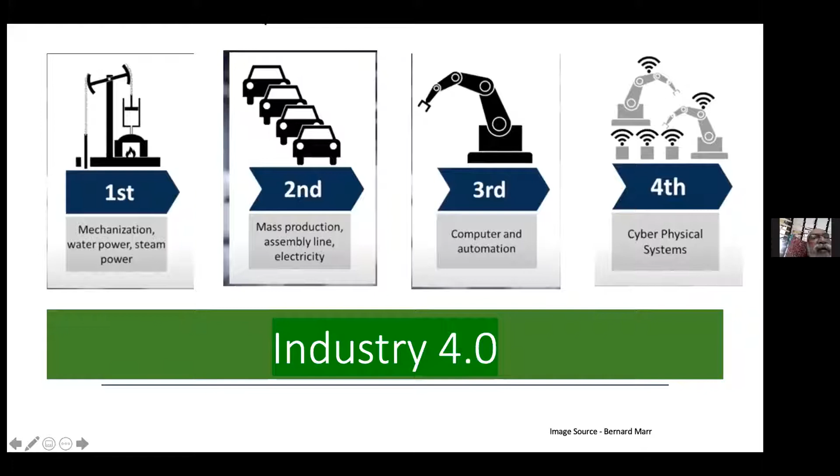I've taken this course from a talk by Bernard Marr, a thought leader in this technology space. So let's go through the 4 industrial revolutions. The first industrial revolution started around 1770, over 250 years back, when mechanization was done with the availability of things like steam power and water power - when mills and all were started, where water mills and steam power were empowering some kind of mechanization to be done.

The second industrial revolution was really when there was mass production with the advent of electricity, about 150 years back in the 1850s-1870s, when assembly lines and all started getting organized, partly because the main driver was that availability of electricity changed a lot of the things happening in the industry. The third was about 50 years back when the first computers came into the industry, and a lot of automation happened then, particularly in service sectors like banking, travel and all of that - there was a whole lot of automation driven because of the advent of computers.

The fourth is what is expected now in terms of Industry 4.0, defined as cyber physical systems. What is leading this is really the availability of two things: one, the internet, because it's connecting everything. So far the ubiquitous nature of the internet was lacking, it was not available as much. With the advent of newer technologies and speeds going up, with 5G coming in, this is only going to increase - we constantly see elements of this happening today.

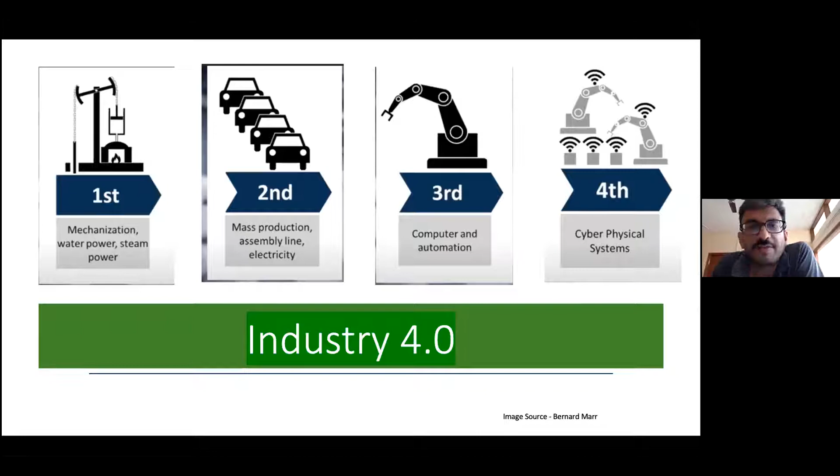Now, Industry 4.0 refers to the convergence of technologies: advanced robotics, manufacturing, augmented reality, simulations, cloud, internet, cybersecurity, and big data.

One of the things that happens when so many devices, billions and billions, are connected is that it gives so much data that has to be handled, residing with the connected systems on the cloud, where analytics could be run to find patterns and predict a lot of things.

It is expected—I was seeing a talk by futurist Tony Seba, which says industrialization and automation levels are going to reach such a high degree in coming years in terms of autonomous cars, as well as the ability to sense how much parking is available, that people will stop owning cars. One fallout is expected to be that real estate prices in America will fall big time because the number of parking spaces will come down. So that's the kind of impact that's going to come with technology becoming popular in the coming days.

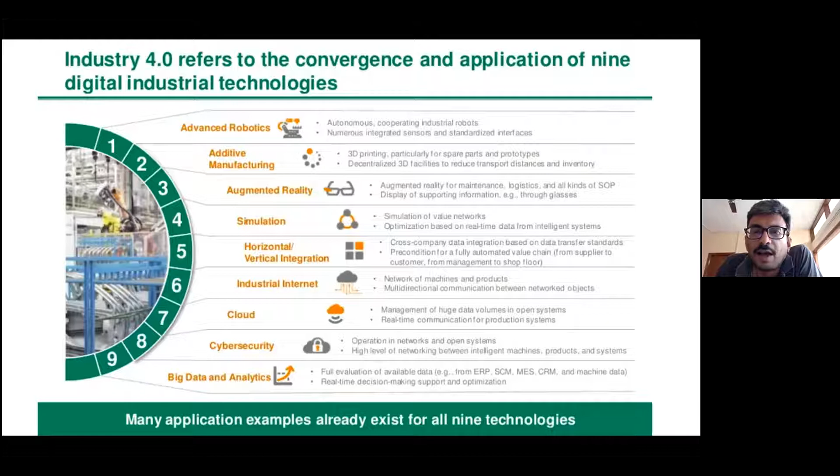My particular involvement—I wanted to talk to you briefly about this—is that when we were all in school, I'd assume we had not much exposure to this. Today there is a lot of emphasis in our academic career space towards this, and I have been involved with bringing up a lab in my own school.

This is actually sponsored given the importance of Industry 4.0, which is so significant that today the government has recognized it and is funding labs called Atal Tinkering Labs in schools, both private and government, where these kinds of technologies are coming in. So no longer do children have to wait until engineering to get exposed to this kind of technology.

Fully sensing the importance of this, the Atal Tinkering Lab is something I've been involved in setting up in my school, where children in class 9 and 10 are exposed to things like 3D printing, sensors, controllers, drones, design thinking, computational thinking, ideation, and so forth.

That is the kind of impact technology is having, that even in the school curriculum today we are going to see so much of it being brought in. So that's briefly from me. I'll stop here and let my co-host Ravi Huddar talk about his own experience closer to the industry itself. Thank you.

Good morning. Ravi Huddar, '88 batch, electrical. Good morning, Ravi.

Sanjit has given a brief introduction about what 4.0 is, starting from the first revolution. I've been in this business, industrial automation, for the last 25 years. What he described is revolutions 1 and 2. The third revolution started in the 1970s, where we were more into controls, PLCs mainly, and now 4.0 starts.

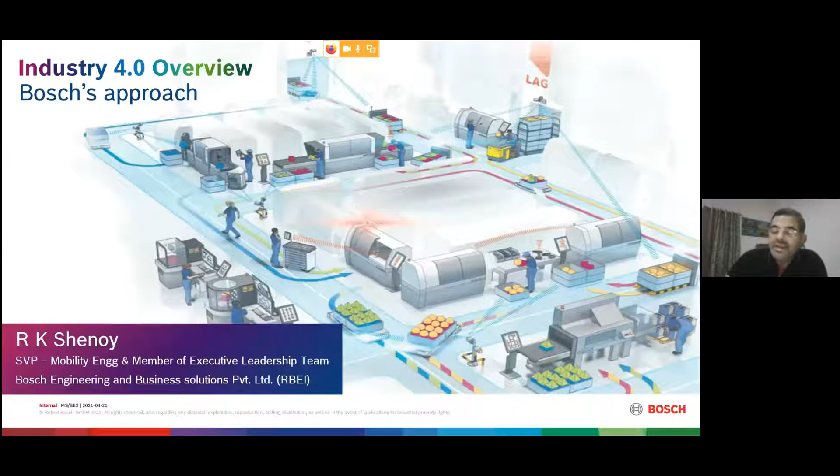Okay, thanks everyone, nice to be on this platform. I'm glad to talk on Industry 4.0, a topic where a lot of work is happening. I'd like to give a short intro on how I see Industry 4.0, and then go on to what we're doing at Bosch with some examples so we can connect with this topic well. I'll skip most of the intro, except to say that since 1986 I passed out in electronics communication, and I enjoyed staying in engineering, which is why I've been with Bosch all these years, working across various domains. I started with industrial automation for the first 4 years, then moved into mobility. Now I'm connected with Industry 4.0 more from the perspective of offering solutions and products that go into it.

Before I get into Industry 4.0, I'll start with how we see the mega trends happening, which directly connects with this topic. It's clear that most of the population has started living in urban spaces, almost 70% by 2050, which is why cities are becoming more crowded. The alarming part is energy consumption worldwide, we need 30% more by 2035. This means whatever energy we generate today, from fossil fuel and renewables, if we want to improve our living environment, air quality and other aspects, the challenge will be how to generate more energy while reducing dependency on fossil fuel and improving energy efficiency in buildings, industry, and so on.

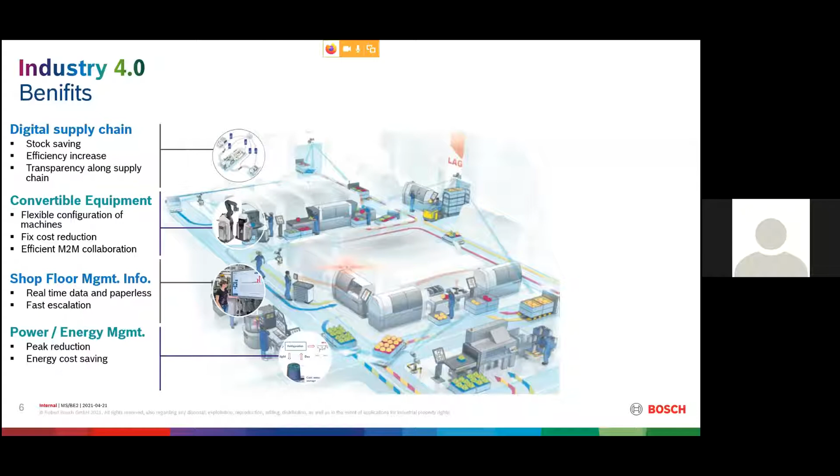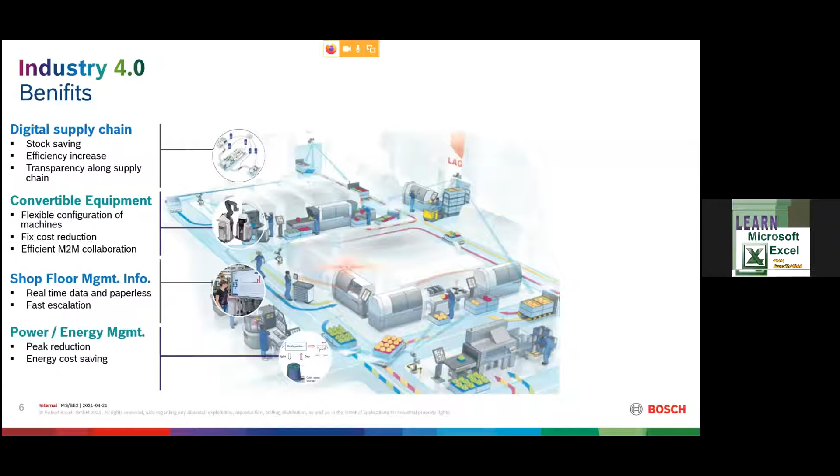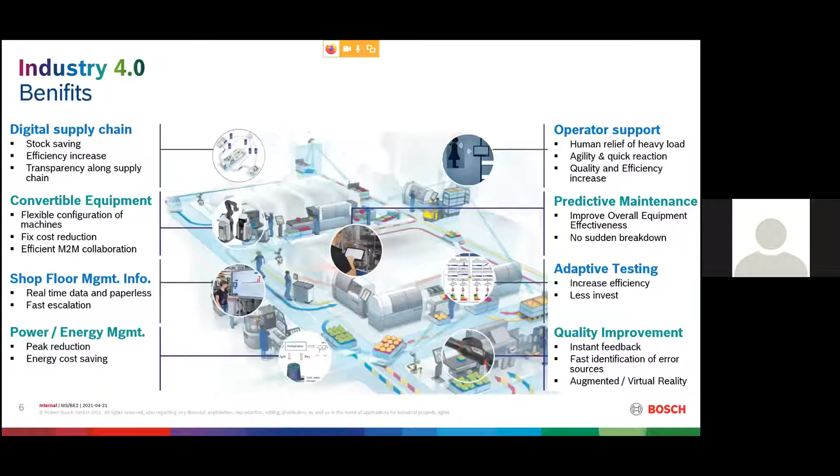Hello, RK. Hola, are you trying to? Hello? Sanjit, are you trying to reach out to RK? Hello, RK, we can't hear you. I'm just calling him, just a minute. Yeah, that is better. Hello. On his other line, you can call him. Yeah, he's unable to hear him, right? Yeah. Try stopping to share and just raise it once. Yeah, we can. He's on mute now. Now can you? You removed mute? Can't, just okay. I can't hear you.

What is the issue, Sanjit? I'm speaking to him, Udupa. Just a minute, please. RK Shenoy? Can you log out and log in? Maybe you just rejoin the conference. Yeah, please. Sorry everybody, he seems to have some problem. I just spoke to Mr. Shenoy, he will log out and log in again. His session is on, but for some reason the audio is not picking. Okay, just give us a minute. He's going to log off and log in again.

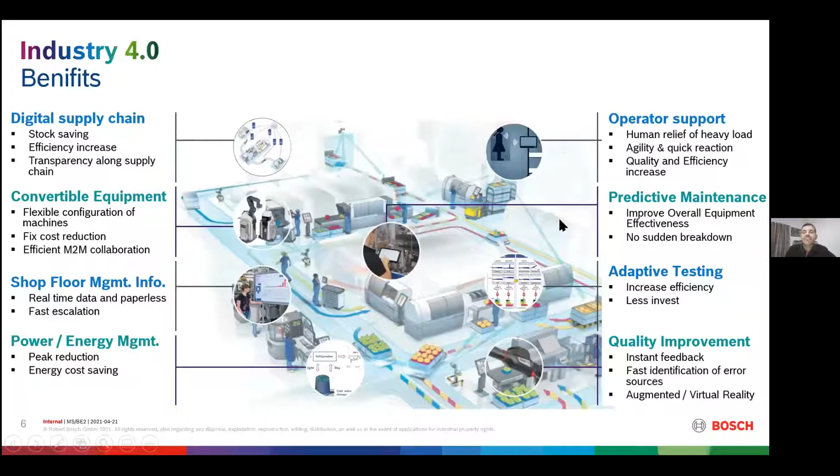Mr. Shenoy, are you back? Doesn't look like it. There's a handful of people joining back, you can hear the beeps. Yeah, he's joined back. Are you able to hear now? Yeah, we can hear you now, sir. Okay, I'm really wondering why. Share your screen and image. Yeah. Good, we can restart, no problem. Okay, I'll just share the screen. Good. Are you able to see now? Yeah, we can see your screen. Okay, great. Yeah, very sorry for that. I don't know what went wrong.

Can you go to the slide now? Yeah, now are you able to see slide 6? Yeah, we can see it. Please go ahead. Okay, yeah, I'll just go a little bit behind.

Basically, what I was trying to say was, I don't know where you could hear me last, but we are talking more from the benefits point of view, starting from the digital supply chain, which I already mentioned, and convertible machines. On power management, which is most important to reduce overall greenhouse gases and to save cost on power, we have various products that do this. For example, what I was mentioning was a product like Phantom, which is non-intrusive, on the power line. This product is able to look at the signature of the power line and understand whether the machine is behaving like it was when installed, based on the current being consumed by individual motors, drives, heating and similar components on a given machine. Based on this, we can tell whether there is opportunity to save, as well as find out faults coming up on individual motors and drives in machines. Predictive maintenance is one outcome of that, where if there's a misbehavior, you can know from such signals, as well as from vibration, for example.

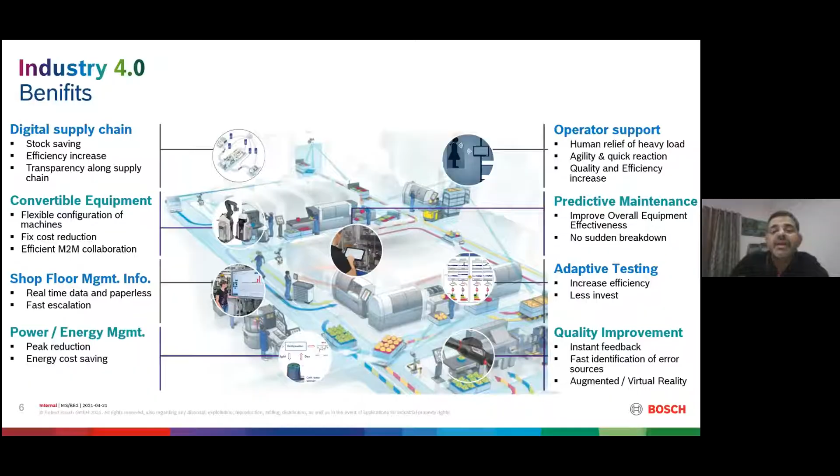To show an example, this is how we believe factories will look like, where as you see the machines here, many of them are independently configurable, and there are robots put in between. Basically, we are talking about having robots within the manufacturing line running maintenance on its own, for example, replenishing the products through supply chain and energy management, like I mentioned already.

And all this data then goes to the cloud. So across all the factories at Bosch, for example, we're able to tap the information from multiple locations. So I can do benchmarking between plants to see whether one particular plant is much better than the other, and then learn from them and implement.

Of course, the whole thing runs on the assumption that they're all connected, and with 5G coming up and the high amount of data that can be derived, Bosch went ahead and registered for a pilot implementation of 5G in industrial application. Unlike 4G, where communication is normally between a node and a central tower, and you have to connect back to the node to collect information, in 5G each node can communicate with multiple nodes directly. So it's more of a networked environment, with a high amount of data.

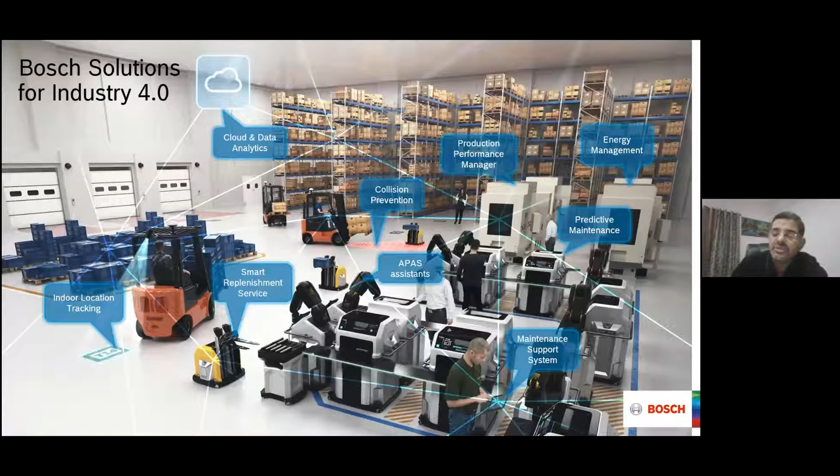So these are what are going to be used in the future. Now this, of course, goes beyond the factory for the whole supply chain, either towards the supplier or the customer, if we are able to track with RFID and many other methodologies of connectivity.

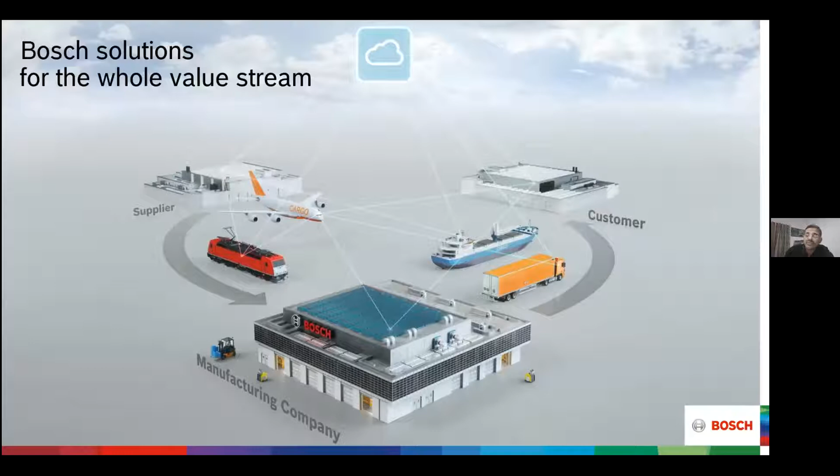And goods, for example, when taking medicines, you're supposed to organize and ensure that they are kept at a particular temperature. There are temperature sensors put on each of the containers to ensure that. And some of them, for example, we need to ensure whether there was a vibration or a fall. So these are also measured through RFID tags with sensors, meaning there are active nodes which can use this information when the item is actually received at the customer, to see that they were properly handled throughout the supply chain.

Now, when you talk about this value stream, what you typically see is the top of the iceberg, which is basically connecting, using the information and using the intelligence. But obviously, Industry 4.0 cannot be implemented unless we have the basic framework ready, and that is what we call below the iceberg — meaning you need to have expertise, a modular platform architecture, standardized IT infrastructure which can enable it, and standardized interfaces between machines through open architecture. Only then is it possible to take benefit.

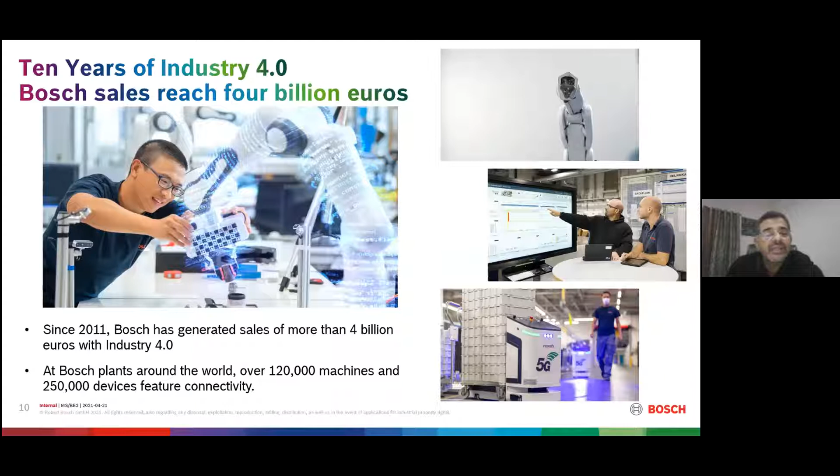So at Bosch, just to quote, we use Industry 4.0 both for our own plants, and this is also a business at Bosch. We actually help many other companies set up Industry 4.0 aspects. And that is where even in India, RBEI, that's Bosch Engineering which I come from, we have one activity where there is a team supporting many industries. I don't want to do a marketing talk here, but just to say it's part of the business as well — meanwhile, it's not just helping us, but we are actually using it as a business.

I'd like to run a short video. I hope it works on Zoom, just to show how the future of robots looks like. This is a robot which is called APAS.

Basically, as you know, it's not allowed for people and robots to work together in an environment, and robots are always put in a sort of cage, because there is a definite possibility of accidents between people and robots. Whereas this cute little robot, which is meanwhile used — I'll try to run the video, it's self-explanatory.

Looks like it's not working here. I think you need to come out of screen show mode to run a video. Now I came out, are you able to see the screen where the video is? Yes, but you're still on screen mode, right? We can see the screen, but the video is not running. The presentation is still on.

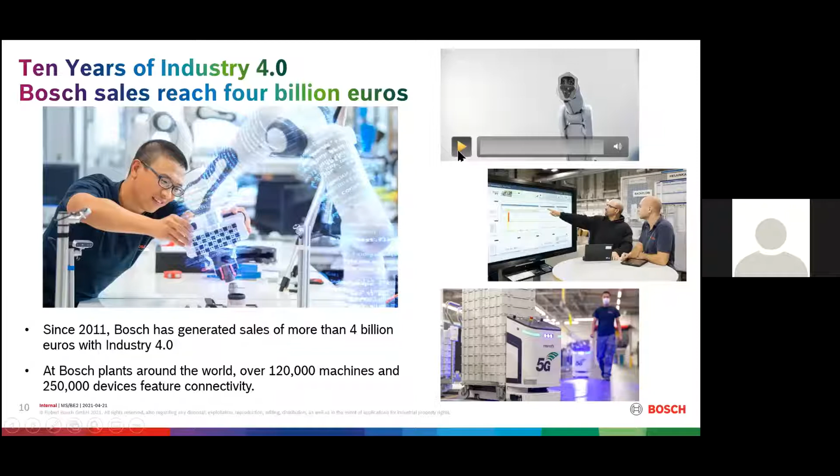Stop sharing the presentation and share again. Yeah, I'll do that, I'll stop share here. One option is to share the entire screen rather than just a specific application like PPT. No, my problem is that on Firefox somehow it's not allowing.

Okay, are you able to see now? Yeah, you can see it. Please go ahead. I'm very sorry, on this particular notebook I didn't have the Zoom app.

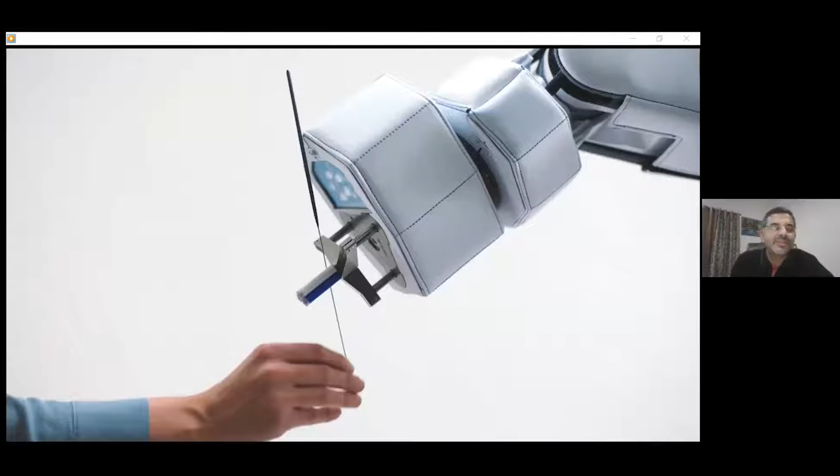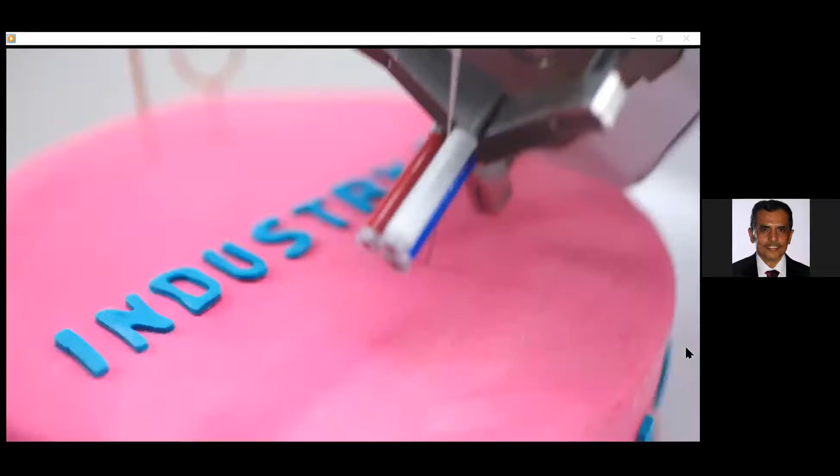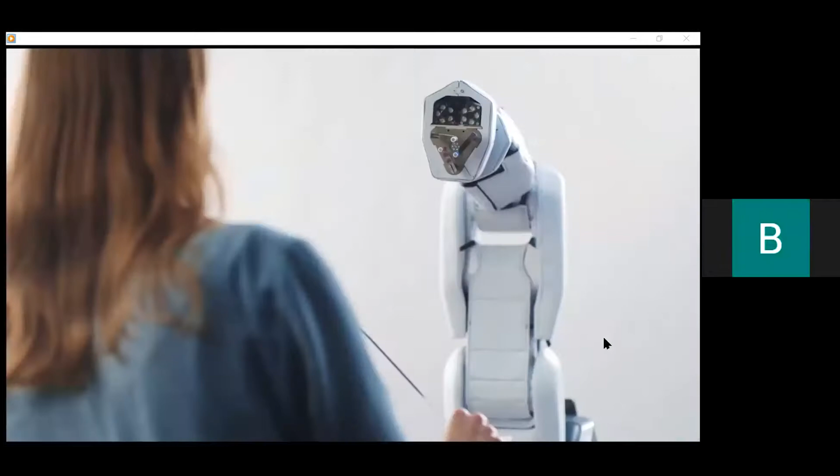Are you able to see now? Yes, we are seeing. Volume is there? No audio, I think before sharing he has to click audio share. Okay, one second, on the left bottom corner there will be an audio option. Share the audio. Okay, I'll do that. Oh yes. No microphone, not there.

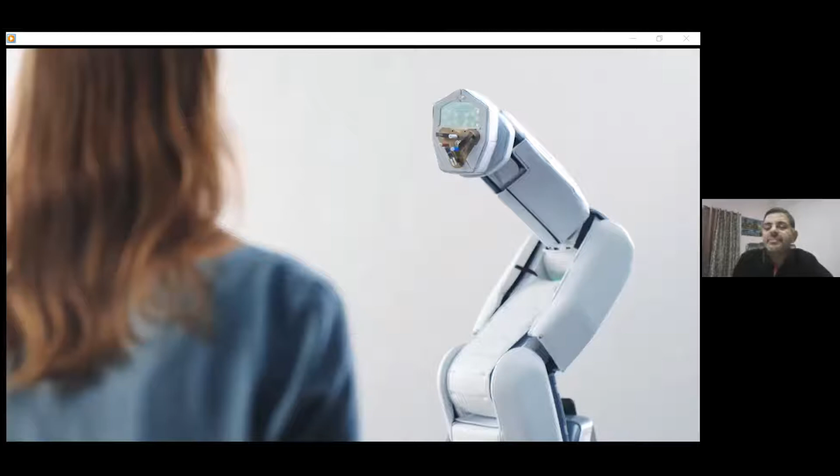Okay, I think it seems to have a problem, I will go ahead without the audio. That's fine, you can give an explanation, Shanai.

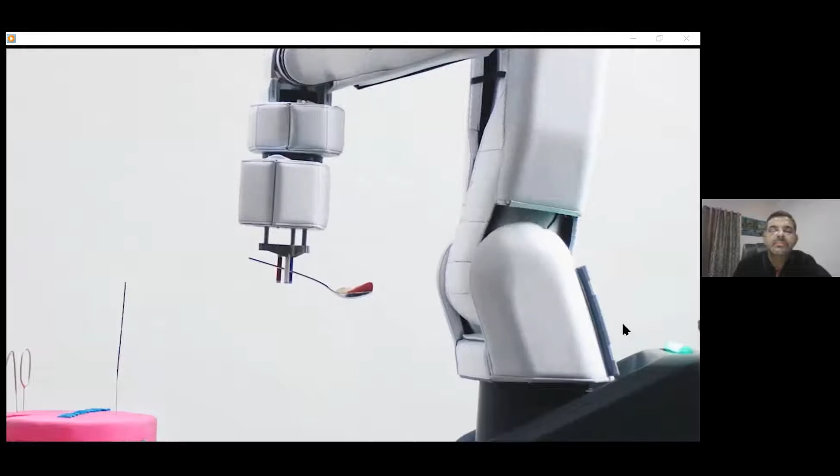Now I would stop here because it has taken quite some time. Sorry for the audio and video challenges we had. Now I think we can use the time for conversations.

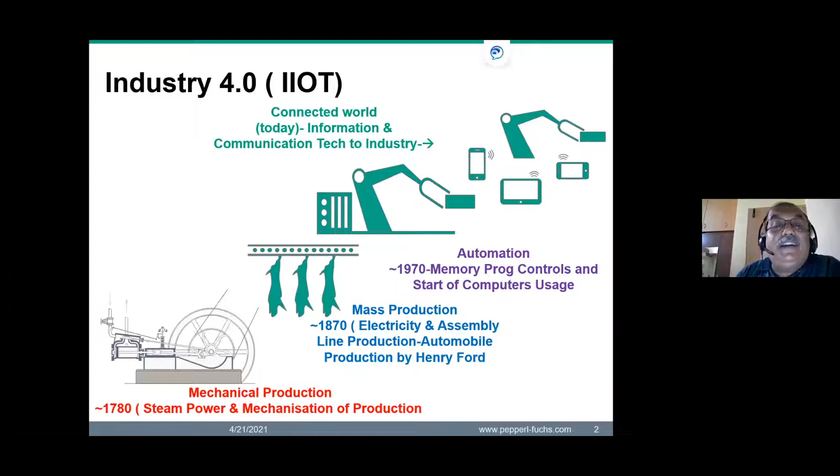What is Industry 4.0? It is nothing but Industry 3.0 plus internet with data crunching. That's all I can say.

For that, we need a smart sensor to give the data back, because earlier the sensor we used only gave the output. Later it was our duty to process it. It would not take the command back.

So now the smart sensor has intelligence, bidirectional communication. It will store the data, and it can do parameter setting, all those things. So it helps in troubleshooting and maintenance, all those things. It's manufacturing plus internet with the data, that is called Industry 4.0, meaning Industry 3.0 plus internet and data.

The smart sensor is a communication-ready sensor technology, which will allow the sensor data to be transferred effectively. The sensor is the same sensor we used in Industry 3.0, but the only thing is these sensors are communication-ready to make them smarter. So Industry 4.0 is only the nomenclature.

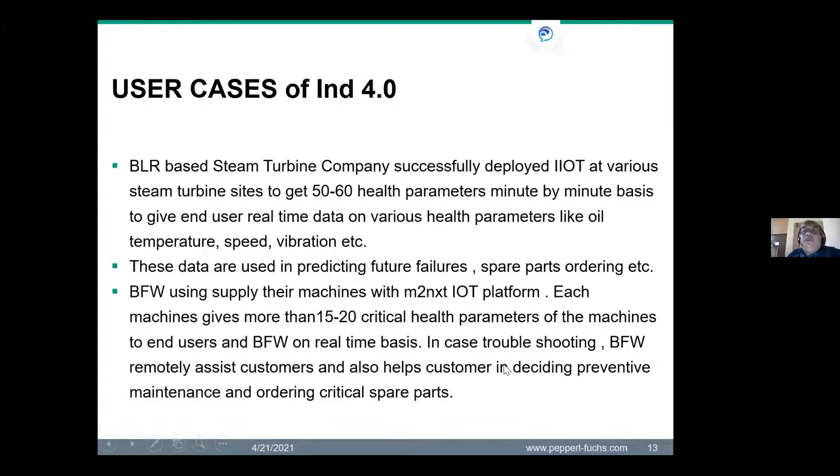And BFW, which is a very old machine tool company, has their own in-house m2nxt IoT platform. With that, they are remotely monitoring 15 to 20 critical health parameters of each machine they supply. Sitting in Bangalore, they can monitor the working of the machine and guide the customer on what they have to correct and what spare parts they can order in advance, so that there is no breakdown maintenance.

So thank you. Mr. Udupa, can you help me with this small video? Because hyperlink, will it work? Let me see, I don't know. Okay Ganesh, directly run the video from YouTube, it's easy. Don't embed it, go to YouTube, put this link and share the screen. Okay, one minute. Or if you can put the link in the chat. Okay, I'll do that, hold on.

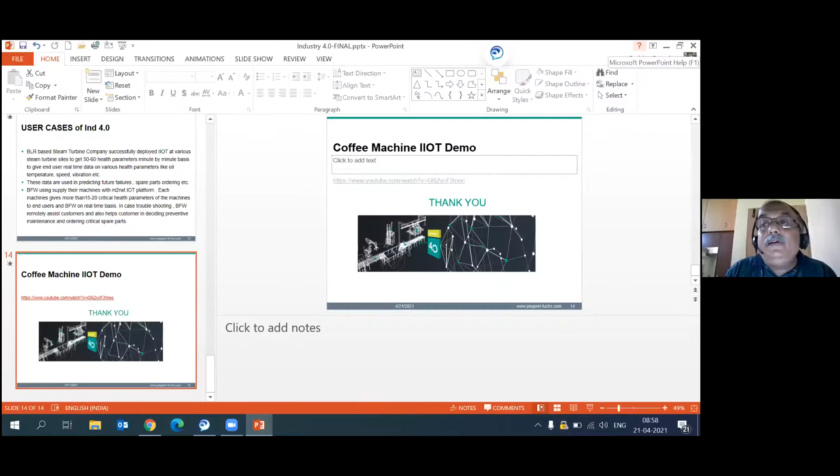Hold on, let us show you a real life example. One minute. Not getting copied. I don't know whether... is this visible? Let us show you a real life example of how. Is it visible? Visible, video? Yeah, visible.

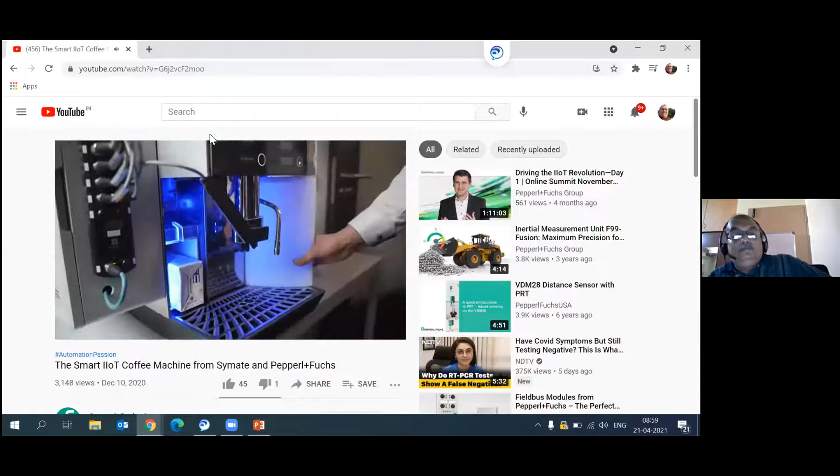Of every company is the coffee machine. When this machine is not running smoothly, it leads to production downtimes, critical situations, and worst case, to irreversible errors. Joking aside, Symate, a manufacturing data expert, uses the Pepperl & Fuchs ICE3 module for a smart IIoT solution and has equipped their coffee machines with it. So this machine is the perfect example for the direct connection to IT systems without the need of a PLC.

Every employee has an RFID tag with his or her personal data and preferences. An online dashboard shows the live data of the machine. This ensures that the need for any action is detected instantly, so that production does not stand still. Do you already see the benefits for your production line? Thanks to Pepperl & Fuchs hardware and Symate software, this solution is easy to integrate and ensures that all processes run smoothly at all times. This is a great IIoT solution, not only for the automation industry, but also for small companies.

Yeah, that's all from my side. Yes, thank you, thank you so much. Thank you, Mr. Ganesh. Very insightful, and thank you, Mr. Shannai. Both of you have taken us through a beautiful overview and details of how Industry 4.0 is going to change our lives in the coming days.